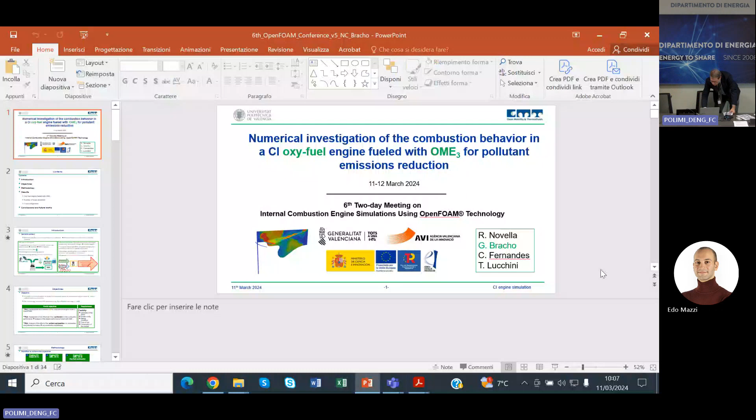Okay, so, title of Gabriela's presentation is Numerical Investigation of the Combustion Behavior in a Compression Ignition Oxy-fuel Engine fueled with OME-3 for pollutant emission reduction.

Thank you, Tommaso, for the introduction. Good morning, do you hear me fine? I am Gabriela Bracho from CMT at Universitat Politecnica de Valencia, and I am going to present the work entitled Numerical Investigation of the Combustion Behavior in a Compression Ignition Oxy-fuel Engine fueled with oxymethyl ether for pollutant emission reductions. This work has been done in collaboration with my colleague Professor Ricardo Novella and Cássio Spohr Fernandes, also from CMT, and with the strong collaboration from Professor Tommaso Lucchini from Politecnico di Milano.

The content of the presentation is the following. I will start with an introduction. In the second point I will describe the objective, followed by the methodology. In the fourth point I will discuss the results. I will focus on the oxy-fuel engine behavior or performance when fueled with oxymethyl ether. Then we are going to analyze the sensitivity regarding the number of orifices in the injector, and finally I will present the outcome, the final configuration we are going to manufacture, followed by some conclusions and future works.

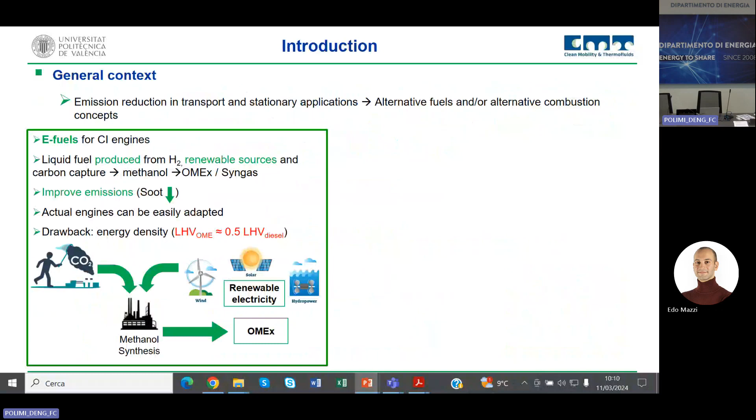On the other side, regarding combustion concepts, there are different technologies we are trying to analyze, for example RCCI, HCCI, etc. In our group we have been developing, since 3 to 4 years ago, something called the oxy-fuel concept. In this case what we are doing is removing the nitrogen from the air, so we only introduce oxygen into the engine. If we introduce only oxygen, the temperature in the combustion is quite high, so to control the temperature in the system we need to dilute this gas with EGR—we introduce gas composed of CO2 and water.

If we remove the nitrogen, the advantage is that all the products formed with nitrogen are also avoided, so we are not going to have NOx. This is the main advantage, but the problem is that the efficiency or fuel consumption is quite high. It decreases the efficiency, so we need to consume more fuel.

In the last edition of this conference, we presented a deep analysis of an engine using oxymethyl ether, and another analysis of an engine fueled with standard diesel in oxy-combustion conditions. But in this case, what we want to do is see how the performance is when we combine the oxy-fuel concept with an engine fueled with oxymethyl ether.

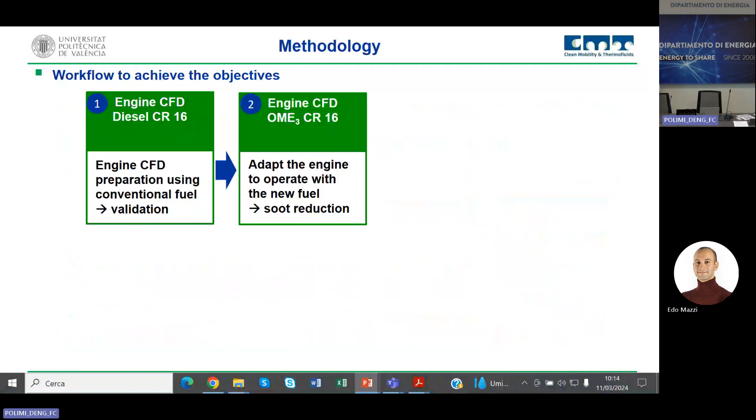Once this is validated, we move to the second step and fuel the same engine, with the same compression ratio, using oxymethyl ether. In this case, we want to evaluate the potential for soot reduction.

In the third step, we move to the oxy-combustion concept, targeting NOx reduction. We knew from previous analysis done over the last three years that we had to increase the compression ratio up to 20 to make this work properly.

Once this is developed, we wanted to see the sensitivity to the number of orifices in the injector, aiming to improve or recover the efficiency lost when applying the oxy-fuel combustion concept, and then finally decide which is the best configuration.

Let's go to the first step. We prepare our model using the OpenFOAM LibICE code. In this case, we were modeling the closed cycle, meaning from IVC to exhaust valve opening, and we use the fuel N-heptane.

The models we use for the platform are the KHRT for breakup, the RNG K-epsilon for turbulence, RIF for the combustion model, Spalding for evaporation, and Angelberger for wall heat transfer.

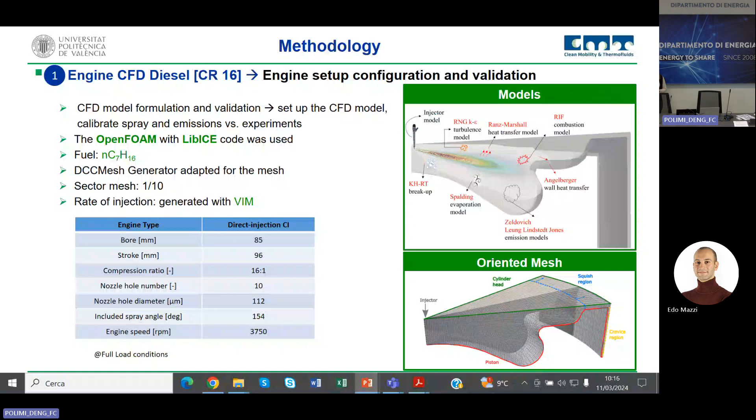So in terms of the results, the very first step was to do the sensitivity analysis of the mesh. We tested 5 meshes, and we realized that after the 3rd mesh we found convergence or independence in the mesh resolution. So we took the 3rd mesh, which has the lowest number of cells compared to the 4th and the 5th. In this case, one closed cycle took about 16 to 18 hours.

We also validated the fuel consumption and the emissions, NOx, and also the soot behavior. So at this point we said, well, this model is fair enough, it is prepared, and let's go to the second step.

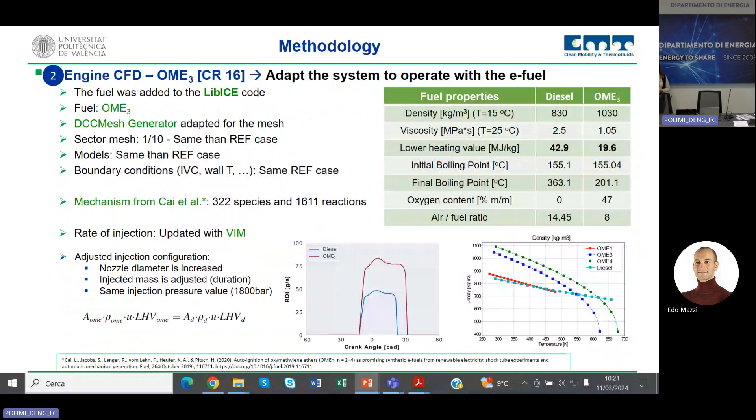To do this, we kept the same number of orifices, and we also kept the same injection pressure. So that means we had to increase the diameter of the nozzles to achieve this rate profile.

In terms of the combustion behavior, we see interesting things. The first is that we have a slightly sooner start of combustion. This is typical, since we have a different cetane number, and we expected this. Also, we have a higher rate of energy release, and then we also see a faster burnout, although the rate of injection is longer. But this is also characteristic of this type of fuel. This is in accordance with what we have seen in other experimental results done in our department, and also in accordance with the literature.

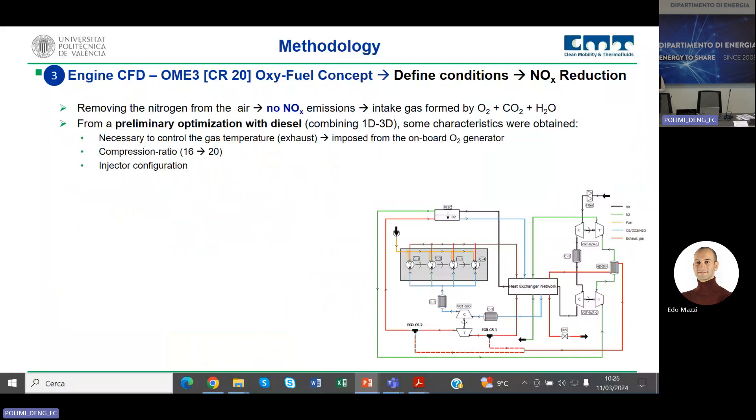This is because in the intake we don't have nitrogen, just a gas mixture of O2, CO2, and water. The properties of this composition are different, so we need to increase the compression ratio to overcome the problems of that composition. We also adapted the injection configuration to work with this higher compression ratio. This was obtained after about 1,000 simulations combined with an optimization algorithm we presented 2 years ago, called particle swarm optimization.

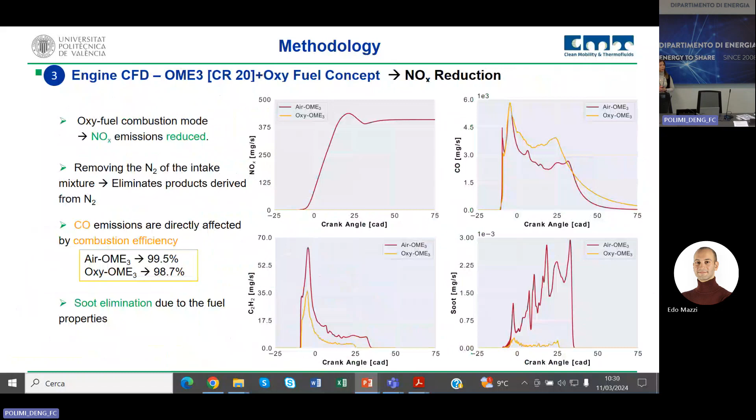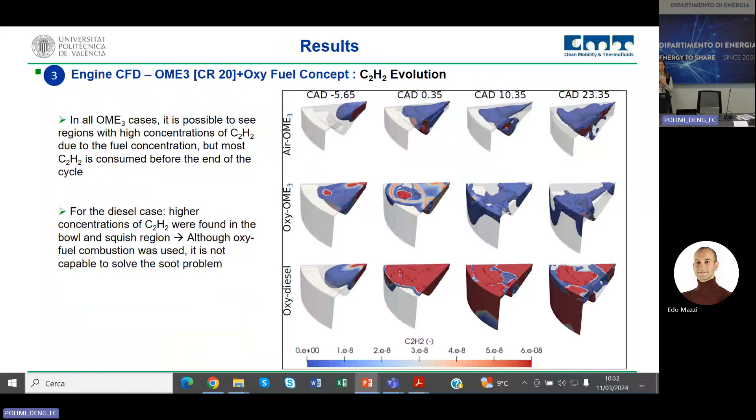If we go to the evolution of acetylene, we also wanted to understand how it is going on. Here we have air plus OME3, and then again the oxy plus oxymethyl. Although this is like a low soot fuel, we have some formation of acetylene with considerable values at some point, but it is consumed—most of it is consumed before the end of the combustion phase. Just as a reference, we present here the oxy with standard diesel, where the acetylene values are considerably much higher. So this is a good thing of the oxymethyl, and our combustion model is able to predict and reproduce this.

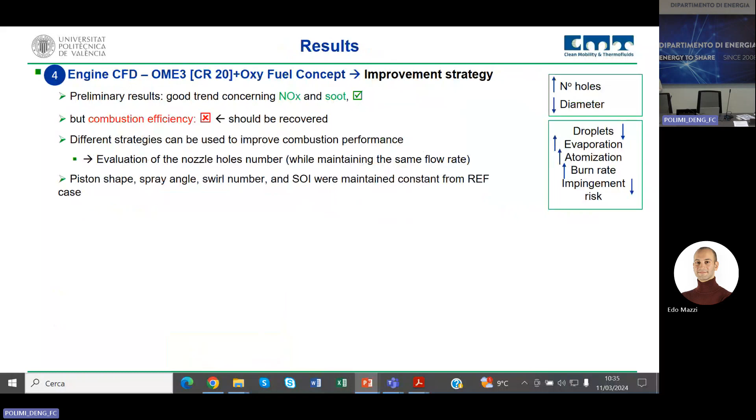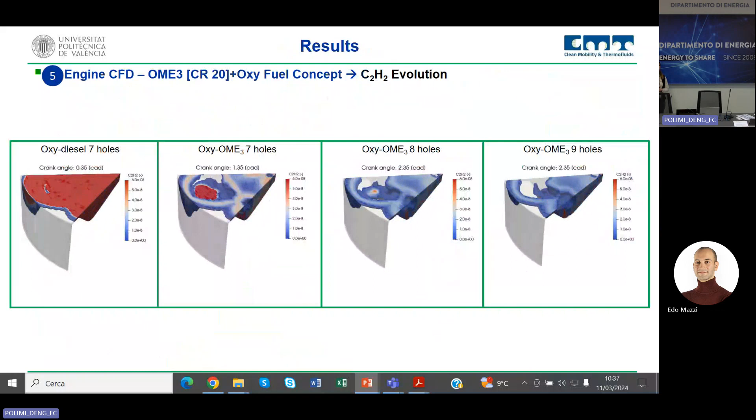In this short example, we are comparing acetylene, using diesel as the reference, where we have a lot of red, meaning high intensity of acetylene. Then we see more blue regions, but when we go to the 9 holes, which is the new configuration, we have less formation in the squish region, so we are improving the system with this strategy.

So at the end, this is the configuration that we selected for manufacturing and testing in the engine.

As a final comment, this is an overall analysis of the sensitivity regarding the injection orifice diameter. Here we are presenting the HC results, and we have less unburned hydrocarbons with the 9 holes. So it's good, we are increasing combustion efficiency, and they are related—this is what we were targeting.

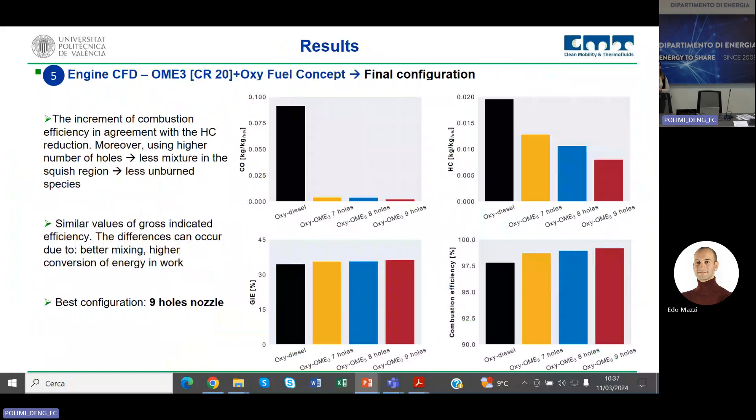So again, the best configuration is this one. If we increase this, we are also increasing the gross indicated efficiency. With this, I finish the presentation.

As a summary, we have been able to combine both platforms that we developed before, one for the OME3 and the other for oxycombustion. The good thing is that we were able to decrease the NOx and decrease the soot.

Of course, we are sacrificing a little bit of efficiency and fuel consumption, so there is still room to improve.

As a next step, we need to validate these results with experimental data, and the test bed is already in place. Let's wait for the results so we can see if these trends are well captured or if we need to readjust some. Also, we need to explore other operating conditions, and right now what we are targeting is to analyze other fuels.

This is part of another work package for another project. We want to see spray development using, for example, ammonia. As a sneak peek of the next step, this is ongoing right now, together with support from Professor Tommaso.

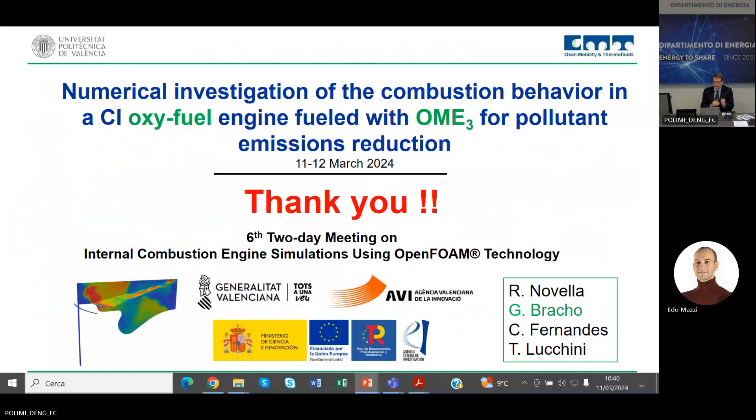Okay, we have time for another question. Yes, please. At some point you showed this one, you see that as well. Again, is it faster than? Yes, we think that is because of the reactivity of the fuel. We have more oxygen, it is more reactive, and it also burns faster.

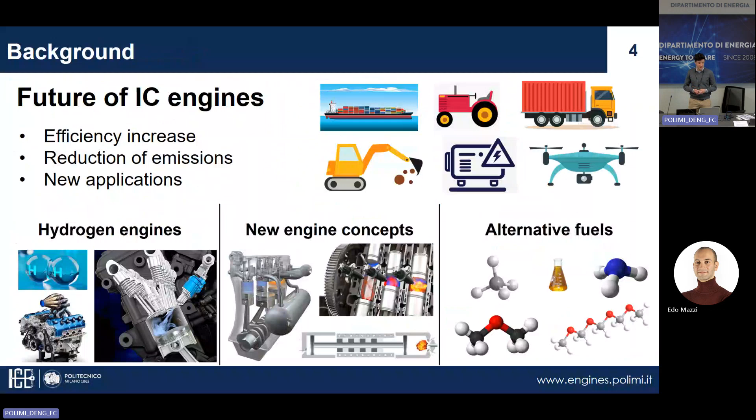So nowadays, internal combustion engines are experiencing a disruptive evolution in order to meet the main target of carbon abatement. And to reach this target, there are mainly 2 ways: first, the usage of alternative fuels, zero carbon or low carbon ones, and the other is the usage of a new engine concept to maximize engine efficiency. So in this talk, we will focus on the hydrogen engine concept as a solution to decarbonize power technology. Hydrogen is a non-conventional fuel compared to traditional hydrocarbons, so we need to assess our consolidated CFD methodologies prior to applying these methodologies for this engine design.

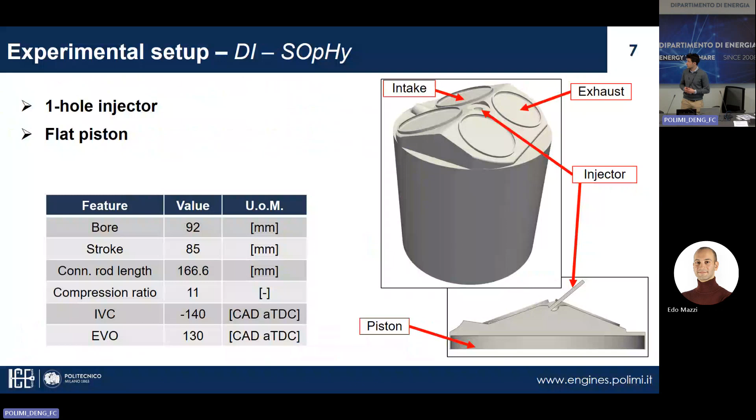So first, let's have a look at the direct injection hydrogen engine configuration called SOpHy. This is a Pentroof configuration with a single hole injector and a flat piston. In this case, we studied a non-reacting condition where hydrogen is directly injected into pure nitrogen. Here we have, in this condition, basically no tumble, and the hydrogen injection is carried out completely during the compression stroke.

About the numerical approach, we simulated only the power cycle using a RANS methodology. As a first step, we employed the standard K-epsilon turbulence model. At intake valve closure, we initialize the flow at rest, with pressure and temperature provided from experimental measurements.

About the hydrogen injector, we extruded 20 millimeters of mesh starting from the nozzle exit section in order to avoid interactions between the hydrogen inlet section and the flow dynamics that happen at the nozzle exit, like expansion fans or normal shocks that are expected in case of an underexpanded nozzle.

In this case, at the inlet, we apply mass flow rate and the total temperature.

About the mesh, in this case we studied two different mesh types. First, we started from a base configuration where we have only a half engine domain because of symmetrical reasons. The mesh is non-oriented, hexahedral-dominant topology, and the piston motion is accomplished by means of dynamic addition and removal of layers. Then we compare this base mesh with a refined strategy where three conical refinements are applied at the exit of the nozzle.

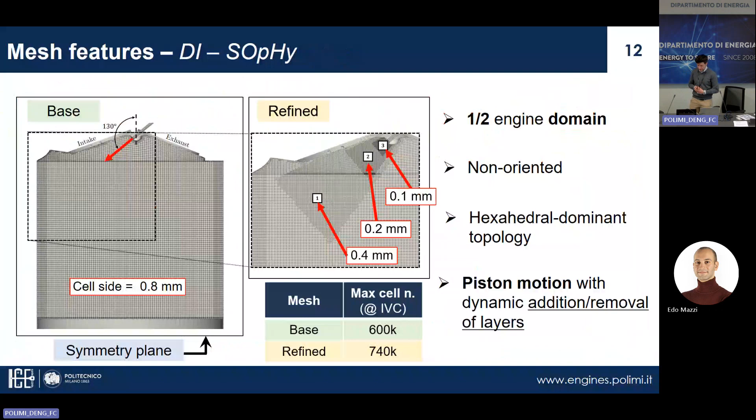The importance of applying these refinements is identified by these results, where if we look at a certain instant during the injection process and look at the Mach number, we can notice that with the base mesh we are not able to predict the flow structures in terms of expansion fan and normal shocks, while the refined approach is able to reproduce these phenomena that impact the distribution of hydrogen inside the cylinder.

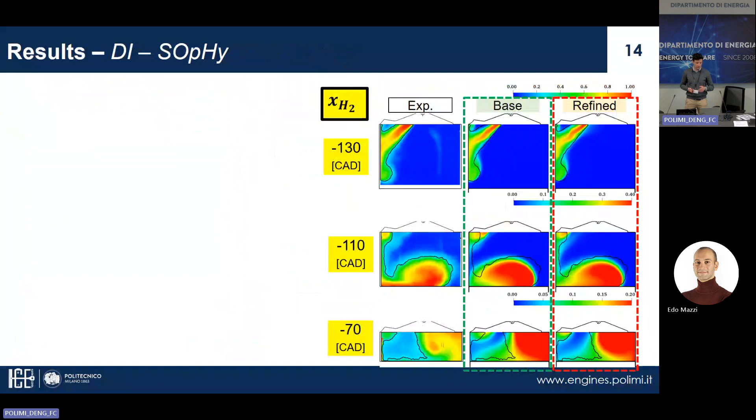If we look at the molar fraction distribution with the refined mesh, base mesh, and experimental, moving from right to left, and look at the instant immediately after the end of the injection process, we observe an improvement with the refined mesh because we are able to predict a reduction of the jet momentum due to the resolved normal shocks. So it is important with hydrogen to have enough mesh refinement to properly capture such events.

However, if we look far away from the end of injection during the compression stroke regarding hydrogen mixing with nitrogen, we still have some underestimations, but compared to literature these results are for now satisfactory. These good results for the mesh can also be detected if we look at the velocity distribution, where in the same bottom region, with the refined mesh we were able to improve the numerical-experimental agreement.

Now let's move to the port fuel injection configuration of the PenHy engine. PenHy engine is a Pentroof engine with a central spark plug and a shaped piston. In this case, we have a rather high tumble ratio, and we studied ultra-lean combustion by means of variation of load and increasing dilution.

Here again, mesh features are similar to the SOpHy engine: basically a half domain of the engine because of symmetrical features, a non-oriented mesh, piston motion again with dynamic addition and removal of layers, and homogeneous mesh features.

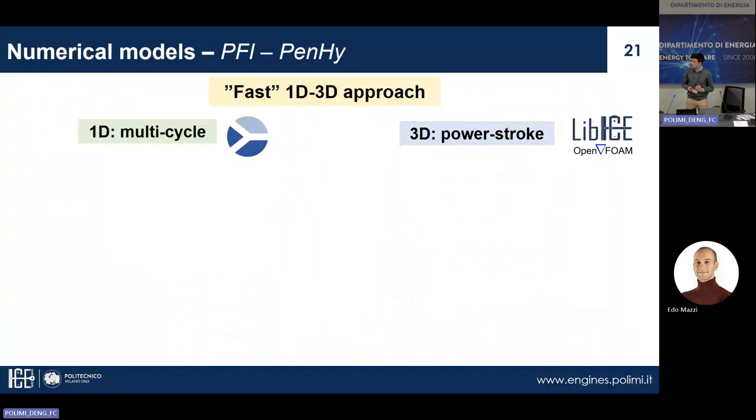But to study this configuration, we tried to use what we call a fast 1D-3D approach. This approach, developed here at Politecnico, aims to have a quick study of an engine configuration without performing a long gas exchange 3D simulation, but providing a first assessment of the engine. To do this, first you need to study the engine with a 1D approach.

In this case, we used GasDyn software, our in-house tool, to do these simulations considering the full engine schematic. Then we retrieved closure conditions of pressure and temperature inside the cylinder to initialize the 3D simulation, performed with LibICE, software developed here at Polimi based on OpenFOAM technology to study engines, in order to simulate only the power stroke.

Then, obviously, after the compression we were able to simulate combustion. But at intake valve closure, we need to initialize the tumble if we do not have a complete gas exchange simulation.

To do this, we developed a new simplified strategy consisting of three steps. First, we initialize the tumble by providing a tumble ratio defined by the user. The user can also define some shape function for the tumble along its axis and radius. Then we let the flow adapt to the geometrical details of the combustion chamber, and finally we need to rescale the velocity field in order to compensate for energy losses in the adaptation stage.

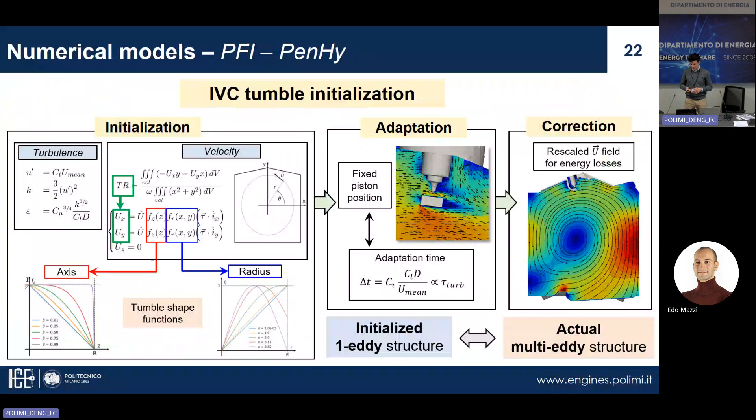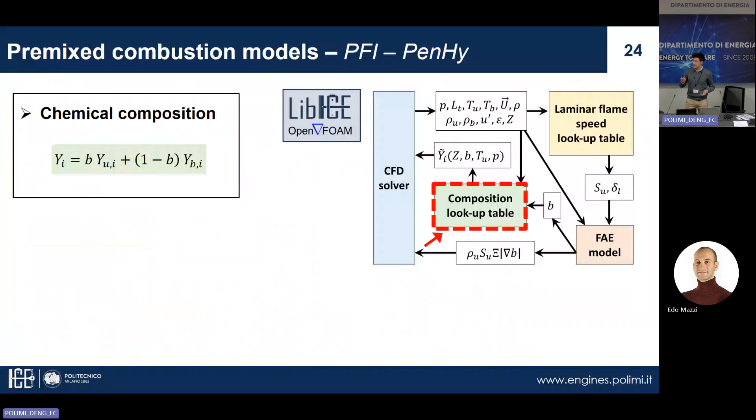About premixed combustion, we employed a model based on the flame area evolution. We solved a regress variable equation to mimic flame propagation, using a simple deposition model for ignition, with turbulent flame propagation modeled according to Peters correlation. For chemical composition, we linearly interpolate the fresh mixture and fully burned mixture composition, both retrieved by tabulated kinetics performed with the OpenSmoke software.

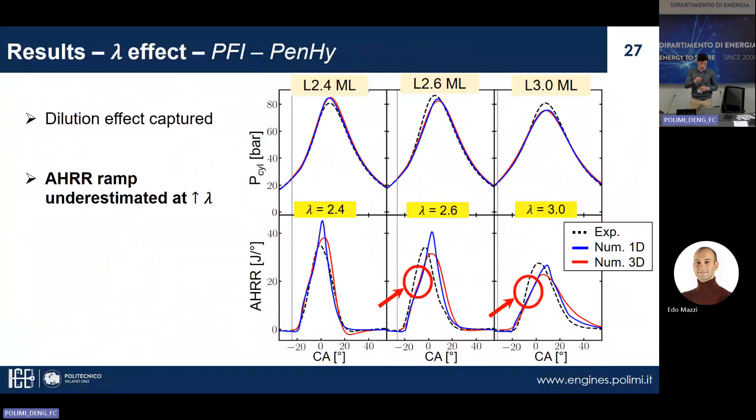Looking at the results with increasing dilution effect, we got rather good results in terms of this phenomena. Experimental measurements are the dashed black line, while 1D and 3D results are reported in blue and red respectively. However, looking deeper at the results, we have an increasing underestimation of the initial ramp of heat release as dilution increases, probably because of under-prediction of laminar flame speed, since the correction we applied was developed only up to a limit of 2.5 lambda, but there are probably other uncertainties we need to clarify.

Looking at the load effect, the experimental trend is also captured, but we have a higher underestimation at high load, probably caused again by the limitation of this correction, which is higher than for dilution, because the laminar flame speed correction here is valid only up to 20 bars, but for the high load condition we exceed 100 bars. So there is room for improvement, but the first results are really promising with this simplified methodology.

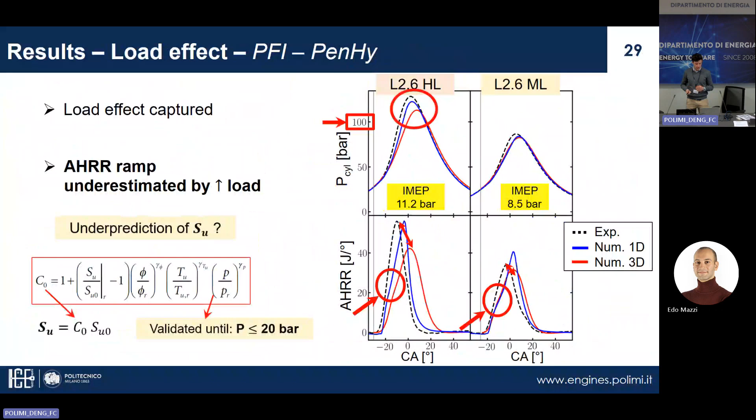Finally, let's complicate our CFD methods a bit and try to simulate the whole full cycle again with port fuel injection, but applied to the FLHy engine. The FLHy engine is characterized by a flat head, central spark plug, and a symmetrical piston bowl. Here we have a rather high swirl ratio, and hydrogen injection is completed about 120 degrees before intake valve closure. We focused our analysis only on the ultra-lean condition.

Here we have a full methodology where we need to perform a complete 3D full cycle simulation. First, we start from 1D analysis of the engine schematic to retrieve boundary conditions for 3D: time-varying pressure and temperature at inlet and outlet, and temperature at the walls.

Then we tested two different strategies. On the left, assuming the PFI injector works properly and everything is homogeneous, we apply a homogeneous hydrogen-air mixture at the inlet, which lets us shorten the computational domain a lot. On the right, we have a complete engine with a full intake manifold where we simulate hydrogen injection, requiring a wider computational domain, while the lambda homogeneous case uses a shorter domain that reduces computational effort.

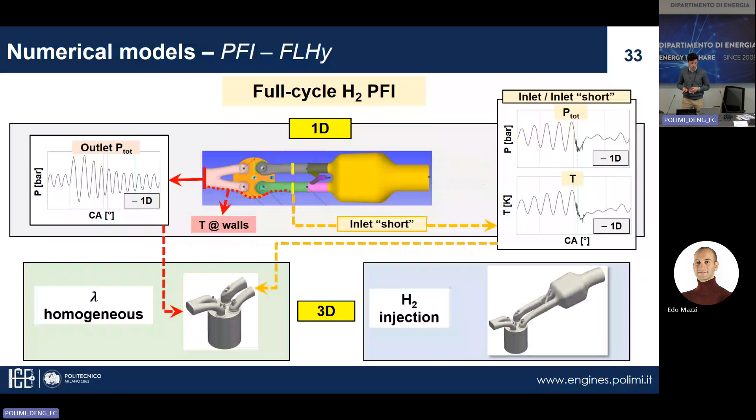About the mesh, looking at this last configuration of lambda homogeneous at exhaust valve opening, we have a full engine domain with a non-oriented mesh and specific refinements to properly capture the details of the combustion chamber and particular valve positions, like the minimum lift, because we need to properly reproduce the flow.

Inside this narrow region, for piston and valve motion, we employ a mesh deformation approach: we deform the mesh until it is no longer valid, then when the validity limit is exceeded, we redo a new mesh, and so on. To cover a whole cycle we employed several meshes with deformation. From the movie, you can see how we modify the refinement according to valve movement to optimize the description of the fluid dynamics and minimize computational effort.

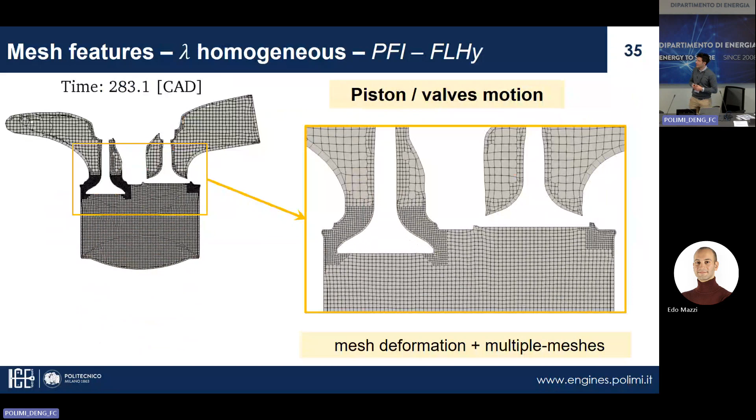In this case, we built up 84 meshes with an average cell size of 500,000 cells. The generation time is rather low, since it was run on a laptop processor in 8 hours.

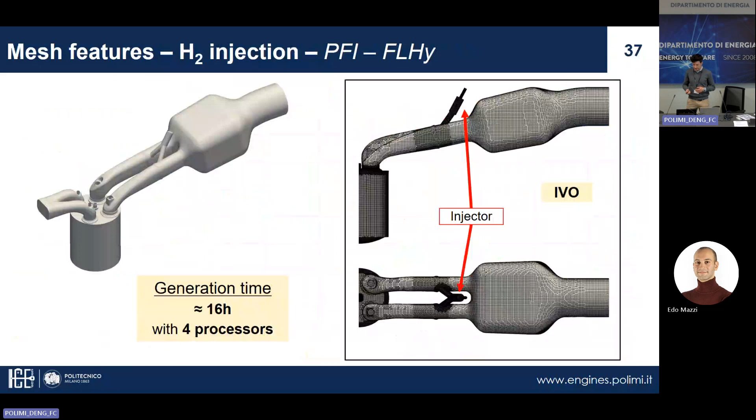The time doubles if we need to also model a hydrogen injector, PFI injector, because we need to properly refine the mesh nearby the injector, and we have a wider 3D domain. About the injector, same strategy was employed for the surface.

So we extrude the mesh here not only to position the inlet far from the nozzle exit, but also to have a cell oriented as the inlet of the hydrogen. And this minimizes computational issues.

About inlet boundary conditions, similarly to the surface, we imposed a mass flow rate and a total temperature. About the Prometheus combustion model, I won't go into details because it is the same approach that we used for the PenHy engine.

we have a good match between them. But the approach is consistent because we applied the 3D schematic boundary condition from the 1D model.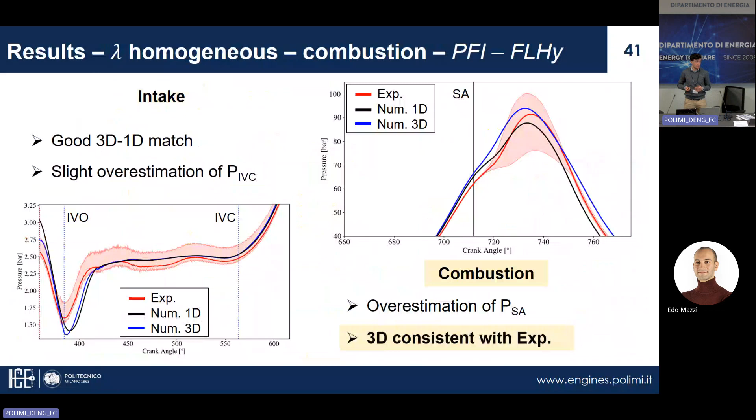So we think that by improving the calibration of the 1D model, we are rather confident that our 3D results will significantly improve, despite the shape already being rather similar to the experimental ones.

What happens instead if we simulate the port-fuel injection? Do we reach a good homogeneity inside the cylinder? Is there any accumulation of hydrogen in the intake manifold?

And to do this, we do need multiple 3D cycles because we need to reach steady-state injection conditions.

And as you can look at in the movie, after cycle 0, we see an accumulation of hydrogen. So it is fundamental to do more consecutive cycles. And here we simulated 3 cycles.

And if we look at the hydrogen mass distribution over different lambdas, at two instants of interest, like intake valve closure on the left and spark advance on the right, we can first observe that from cycle 0, the blue, to cycle 1, the green, we have a variation.

So it means steady state conditions are still not reached. While at cycle 2, basically, we are already almost at steady state features.

Then, if we compare these results with the target air-fuel ratio that we would like to reach, we see that the compression, moving from IVC to spark advance, helps a lot in the homogeneity. And also at spark advance, we do not have a perfect homogeneity because in this case we have some internal recirculation of exhaust gases.

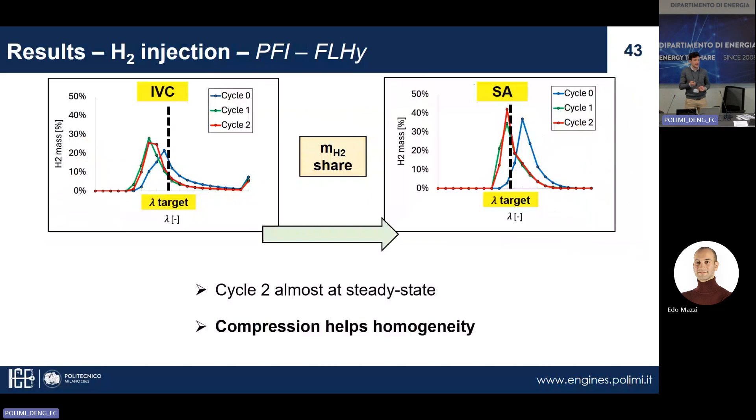But a curiosity is, if we look at the volume share occupied by this small stratification, we can notice that despite the majority of the mass being very close to our target, the volume occupied in the cylinder is more occupied by the richest mixture because of the properties of hydrogen.

So hydrogen is characterized by a high specific volume. And so in case of a slightly richer mixture with respect to our target, its occupancy of volume is wider. And so we have this slight mismatch between the mass stratification and the volume occupancy.

So in conclusion, we can see that with our methodologies, we are able to study 3 different hydrogen internal combustion engines by modeling 2 different injection strategies.

So direct injection, port-fuel injection, and we also have simplified techniques, so we are able to initialize conditions at IVC and do fast simulation also in 3D.

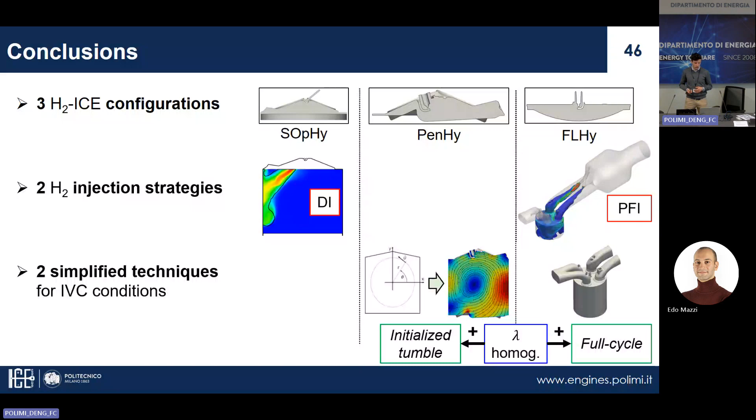About stratified combustion, Tommaso will show you something tomorrow. But anyway, what we can conclude is that with LibICE, we have a rather wide set of validated methods to model spark ignition hydrogen engines.

However, this is only a starting point. So there is a lot of room for improvement.

In fact, the code is always under development in order to improve the experimental numerical consistency, to minimize the computational cost, and also to ease the user-friendly approach.

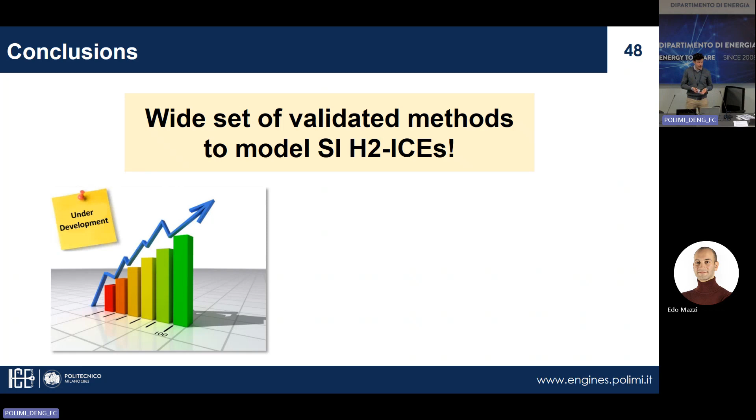And so my suggestion is stay tuned, because new developments will come soon.

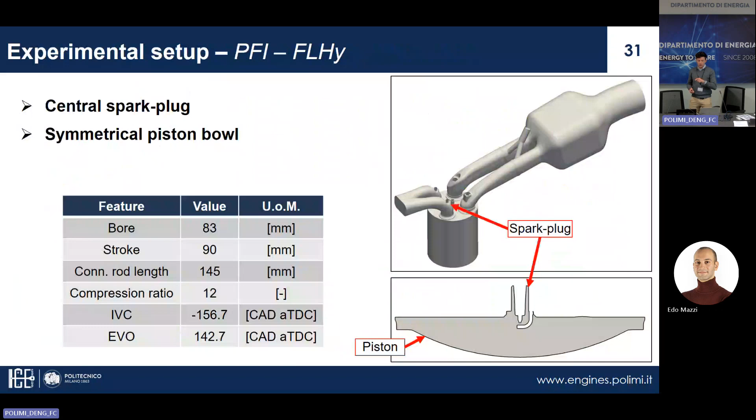We still have a not perfect matching of the tumble motion generated by the hydrogen injection, and probably by improving it we can improve the diffusion, because in our case the vortex is more concentrated and probably keeps the hydrogen there. Even though hydrogen diffuses, the motion - as I said to Benjamin - impacts this. If you have a global average motion, it tends to confine the hydrogen. So probably it's not a matter of Schmidt number, but a matter of flow structures that should be improved for the engine.

Second question I have - what did you do with wall temperatures?

About temperature, we impose a fixed value temperature at walls from 1D, so there is this limitation, but the flame interacts at walls considering that we model the thermal diffusivity according to the turbulence of the cell at the walls, so we model the thermal losses this way, but we impose temperature at walls for now.

About knocking - yes, in this model we do not have a knock model, but we can do it. So in case of need, we also have this possibility, yes.

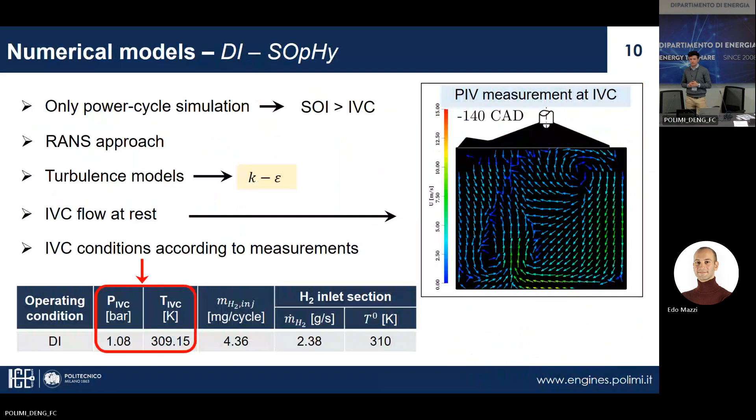These are PIV measurements. And then basically when you have the injection, the flow, in the case without tumble, is totally driven by the injection of hydrogen, because you have high velocity, high momentum, despite the hydrogen being light. I was wondering why you have that.

One motivation could be that you have some discrepancy in the initial condition. The other could be that you are considering only a sector. No, here we are considering a half engine domain. We can try to consider all, but it is symmetrical, so it is not a sector, this is half engine domain.

So here it is a good point. We think we need to improve this tumble, but this tumble is basically generated by the hydrogen injection, because it is totally driven by the injection. So probably it's a jet-wall interaction that we'd like to improve. Yes, but I agree that maybe it's a problem with convection. Yes, it is probably something about convection.

Okay, any other questions? Okay.

Okay, the title of our presentation is on the development of preferential evaporation in isooctane ethanol spray. Thank you for the introduction, very nicely introduced. Today I will mainly focus on the model development and the approach we're taking, which steps we're taking, and then I'm going to show you some intermediate results.

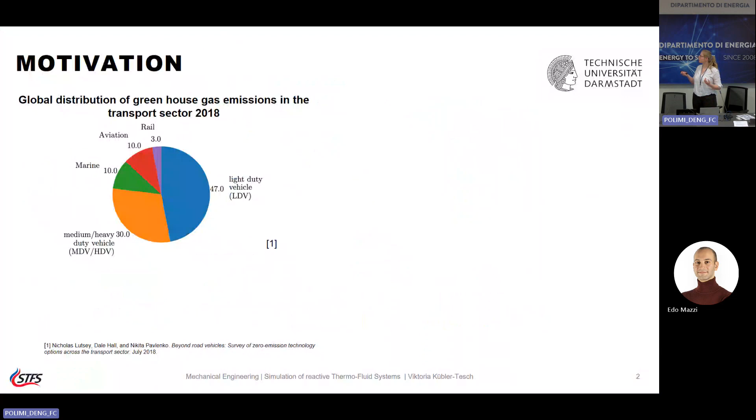But first, let's go to the motivation. As you can see, most of the greenhouse gases in the transport sector are created by internal combustion engines. With the climate crisis, we know we need to improve combustion engines because they are still mainly in use, and going in the wrong direction. However, modern combustion engines have stricter requirements. For example, we expect them to have low pollutant emissions and greenhouse gas, but also soot emissions, and we also want them to use CO2 neutral fuels.

And here, ethanol as a promising renewable fuel is introduced. This is what I'm focusing on. Actually, there was a New York Times article three weeks ago showing that in US politics, a ban on E15 fuels was lifted. So we will see more ethanol maybe in the US.

With those new ICE engines, we also expect them to still have a higher combustion efficiency. With new fuels, we have new challenges. We will have different spray and mixture formation, which will inherently affect the combustion. In my presentation, I will be focusing on the spray formation and here on the model development.

We are using in OpenFOAM the Euler-Lagrange method. Here we're describing the liquid in parcels, which we are following, and each parcel represents a collection of identical droplets.

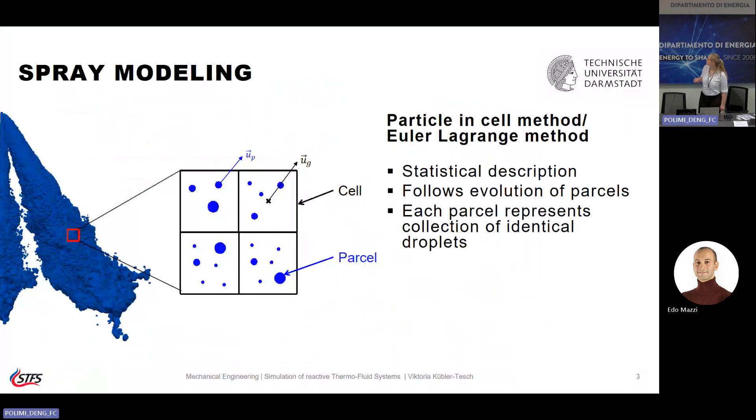If we're looking into the particle modeling, we have a particle, we have some flow around it, and we solve the momentum equation, and we assume the particle to have a drag force and gravity acting on it.

We're also solving some sort of an energy equation. Here we're looking at the temperature of the droplet, which is affected by convective heat transfer, shown here with QS, and also which is affected by the evaporation happening in the droplet, which is modeled this way.

So that way we have a temperature equation, and then we're also looking with multi-component fuels at the species in the droplet. When we look at the species, we're looking at the interface between the liquid and gas phase, and here we assume a vapor-liquid equilibrium, which with multiple components will lead to preferential evaporation, and usually it is modeled with ideal liquid and gas.

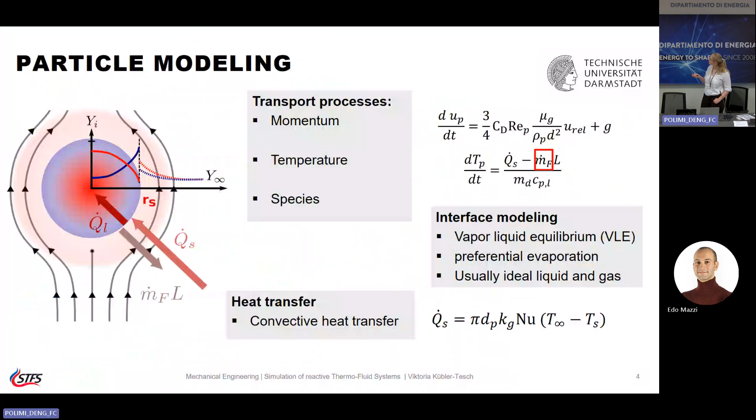Usually it is modeled with ideal liquid and gas. However, the species usually also affects the heat transfer, so those are strongly coupled.

When we model the evaporation, here is shown the term for the mass transfer from the droplet into the gas. We're using the Spalding mass number, which looks at the gas mass fraction at the surface and also the gas mass fraction in the far field. We're using that for the species transport.

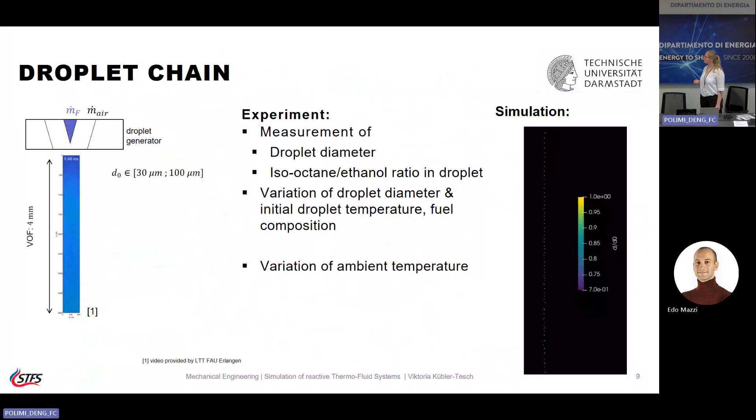After that, I also looked at an ideal droplet chain with different ethanol concentrations at a high temperature. What you can see here is that with a low ethanol volume concentration, isooctane also starts accumulating in the droplet, and unsurprisingly, the same happens for the E70. We expect to see a different result here with a real VLE.

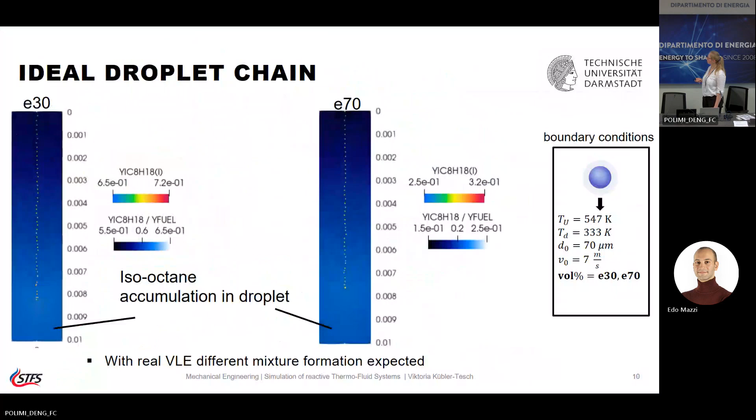Lastly, we also looked into a Spray G condition with two different fuels. One is a 3-component fuel of N-pentane, isooctane, and undecane. The other is a 9-component fuel called PACE 20, which contains roughly 10 volume percent ethanol. We modeled those after experimental data, and the focus here was on the mixture formation in the gas phase.

The way this was modeled is they looked at the ratio of the low volatile fuel, for the 3-component fuel this was undecane, relative to the other fuel components. What you can see is that there's some segregation, with most of the low volatile fuel close to the nozzle. If you look at this with the PACE 20 fuel, using the same modeling approach for the low volatile fuel, there's a higher segregation in the spatial area of the mixture.

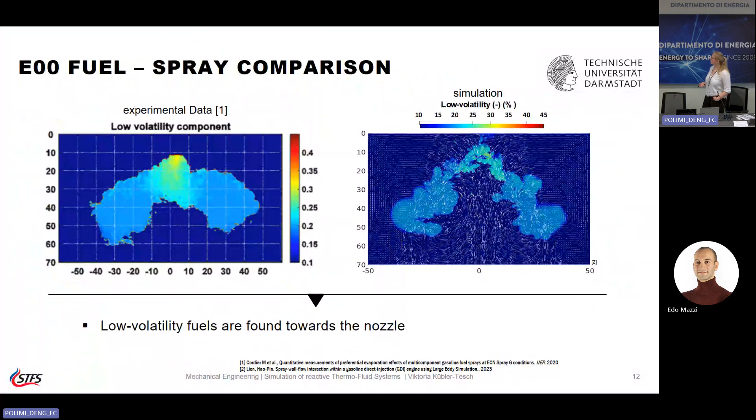This is also done with an ideal VLE approach, and we matched this case pretty well. You can see the segregation very close to the nozzle, and this was done quite well. But if we look at the fuel containing ethanol, we do see high discrepancies, and the segregation there is of course also higher. This will be interesting to analyze with a real VLE.

I think that's it. As a summary, I introduced the modeling approach of a real VLE, which will be implemented in OpenFOAM. The approach here is to increase the complexity and validate during the whole implementation process.

In general, the outlook is that I hope to present the results of the real VLE sprays. I think the step after that would be to look into combustion characteristics with those different mixture formations. This will be very interesting because we know that alcohol fuels, in the case of a diesel engine, have very different combustion characteristics. In this diesel spray, we see that alcohol fuels actually have a higher ignition delay time. So it will be interesting to see how this affects gasoline spray.

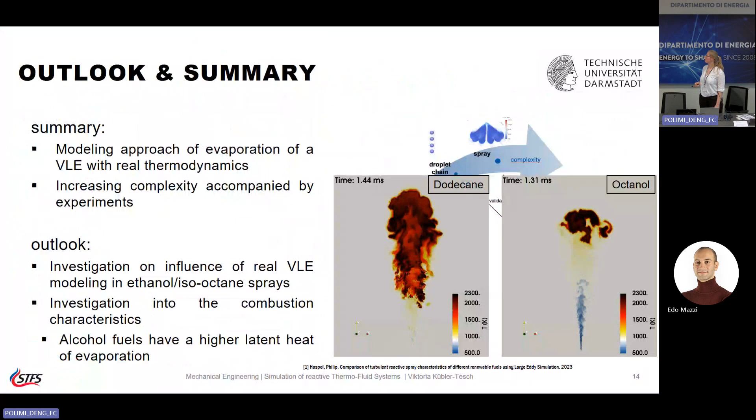And here I'm at the end. Thank you for your attention. I would also like to say thank you to all my colleagues and my boss. Thank you.

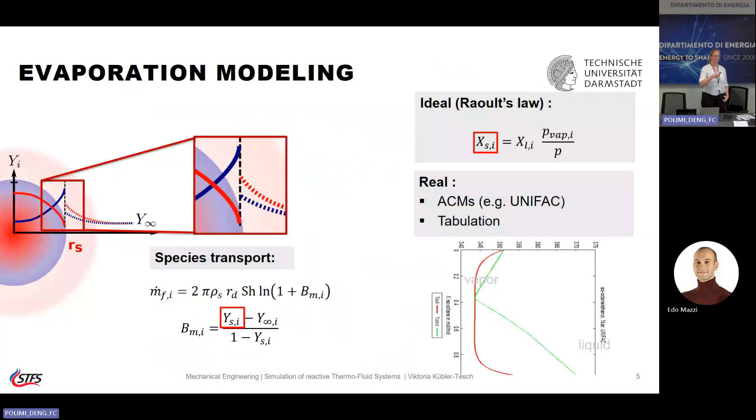More questions? Imagine that the next step will be the pressure inside the droplet. I understood, so the next step - this is when we're inside the droplet. Actually, I'm first doing the real VLE on the outside, and I don't think full VLE in a spray will be feasible to calculate during runtime, so I'm currently focusing on the VLE on the surface and implementing the real thermodynamic model. The next step will be in the spray, but I'm still assuming 0D in the droplet.

Any more questions? I have one. You show that you are tabulating the saturation molar fraction - you mean this one? Yes, you pick up X_s and put it in the Spalding formulation, but this is taken from a table instead of calculated from a correlation. How long does it take to generate a table? I'm unsure, I don't think... I think the hard part is table generation for bicomponent fuel, which is rather simple. Okay, bicomponent fuel - the more components you have, the more complicated it gets.

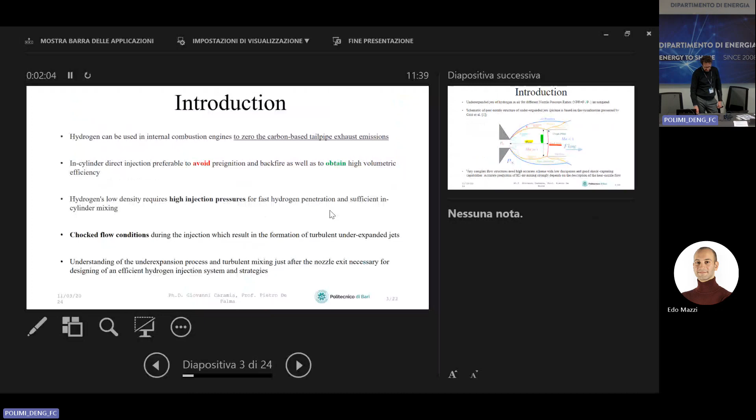This results in the formation of turbulent underexpanded jets. Understanding the underexpansion process and turbulent mixing just after the nozzle exit is necessary for designing an efficient hydrogen injection system and strategies. Here I'm showing the complex structure of the jet just outside the nozzle exit, and here we can define the NPR, the nozzle pressure ratio.

We will investigate many different values of this parameter. Here I also highlighted the two main characteristic parameters of an underexpanded jet: the Mach disk height and the Mach disk width. You can note that the structure is very complex, so the need for a highly accurate scheme with low dissipation and good shock capturing is needed.

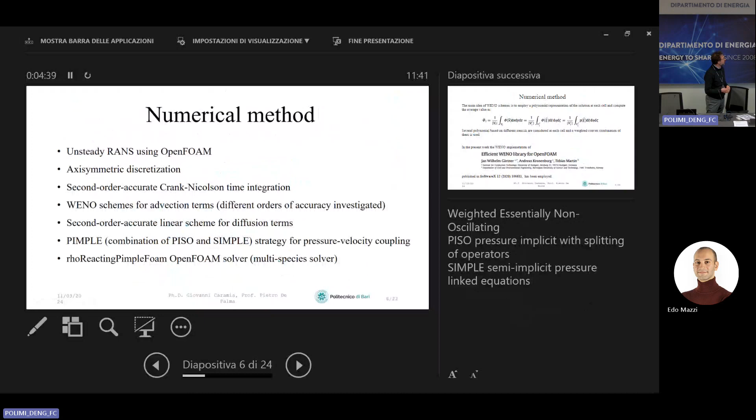We use axis symmetric discretization for a lighter computational effort, with second order accurate Crank-Nicolson time integration and WENO schemes for advection terms, considering different orders of accuracy. For diffusion terms, we use the second order accurate linear scheme, and for pressure-velocity coupling, we use the PIMPLE strategy. The OpenFOAM solver name is rhoReactingPimpleFoam.

Regarding the numerical method, we have to cite the work of Gärtner, who developed the WENO scheme inside the OpenFOAM library.

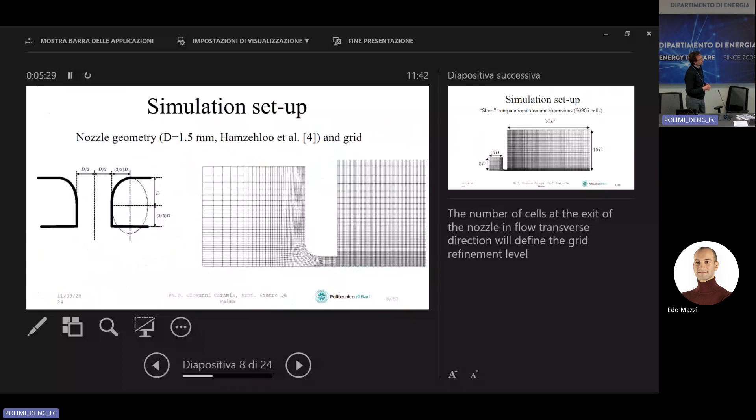Here we start with the simulation setup, depicting the nozzle geometry and the grid structure near the nozzle exit and inside the nozzle. Here is the computational domain. We call it the short one, used to better investigate the jet structure near the nozzle exit, while we used a longer one with local grid refinement to better understand the hydrogen diffusion process inside the chamber.

The simulation initial and boundary conditions consisted of rest conditions as initial condition. It was assumed that hydrogen occupied the entire high pressure reservoir and a tiny part of the converging nozzle, up to 1.4 times the diameter value upstream of the nozzle exit. Air occupied the low pressure ambient and the remaining in-nozzle volume. As a curiosity, it was possible to use a slip condition inside the nozzle because of the verified Knudsen number.

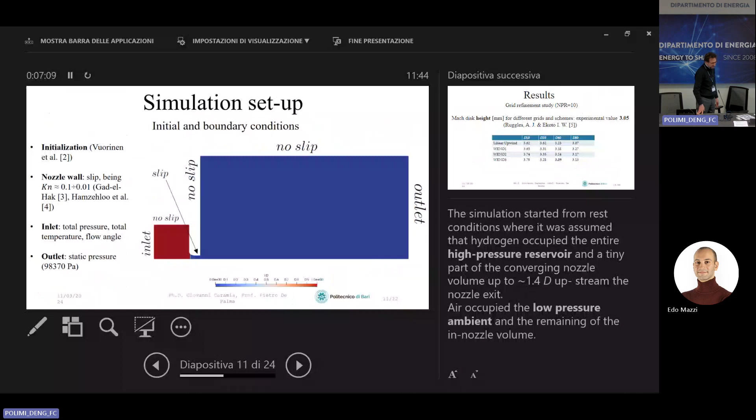Now we are at the grid refinement study. We consider a value of NPR equal to 10, and here we consider the Mach disk height as a parameter, considering an experimental value of 3.05. Our grid refinement study also dealt with the use of different discretization schemes. Here XX identifies the number of cells at the nozzle exit in the flow transverse direction, while N identifies the order of accuracy: N1 is second order, N2 third order, and N3 fourth order.

As we can see, we reached good agreement with the experimental value and stabilization of the calculated value, considering N3 and 40 as the grid refinement level. The same holds for the Mach disk width.

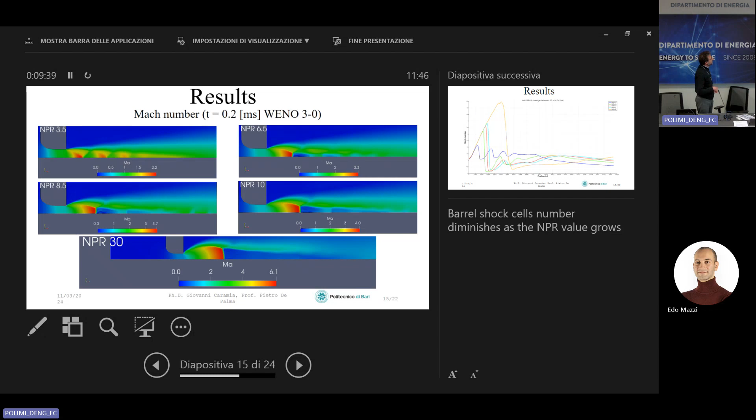Varying the NPR values, the structure of the flow changes. Counterintuitively, the number of barrel shock cells - where a barrel shock cell is this structure here - decreases when the NPR values increase.

Something similar here: this is the Mach number on the bottom part of the computational domain, and we can see two things mainly. First, the Mach disk height increases as NPR increases, and secondary Mach disks appear that vanish in the same way.

The message of this slide is why use higher order discretization schemes: because with these schemes we can capture instabilities that lower discretization order schemes do not capture. Specifically, on the lower right, we can see Kelvin-Helmholtz-like instabilities using WENO 3.0 discretization scheme, where by WENO 3.0 I mean a fourth order discretization scheme without a limiter.

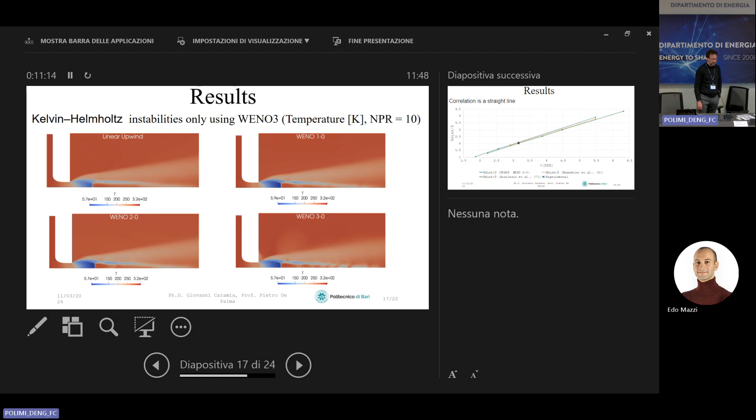Again, results: this is a correlation between the Mach disk height and the square root of NPR values. We can see that our computation resembles the straight line correlation type, and importantly, the gradient of this line is in good agreement with numerical and experimental data available in literature.

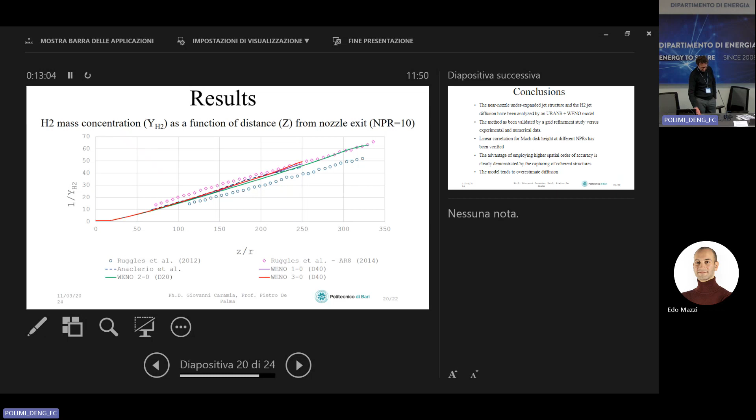So here we are at the conclusions. The near-nozzle under-expanded jet structure and the hydrogen jet diffusion have been analyzed by a URANS and WENO model. The method has been validated by a grid refinement study versus experimental and numerical data. A linear correlation for Mach disk height at different NPR values has been verified, and the advantage of employing higher spatial order of accuracy is clearly demonstrated by the capturing of coherent structures.

We have to say that the model tends to slightly overestimate diffusion, for the most part far away from the nozzle exit.

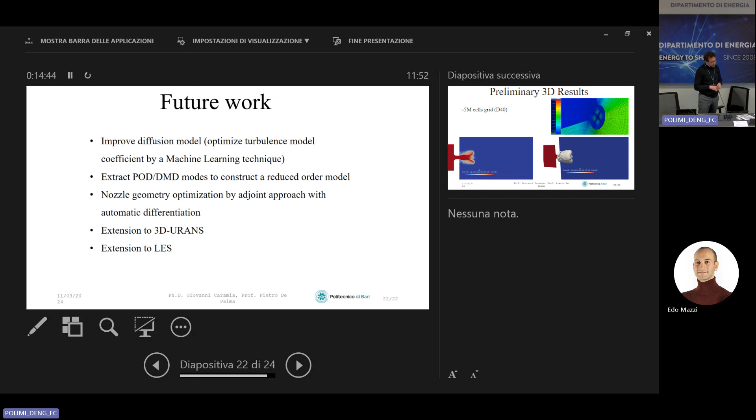Future work includes improving the diffusion model, eventually using machine learning techniques to extract proper orthogonal decomposition or dynamic mode decomposition modes to construct a reduced order model, optimization of the nozzle geometry using adjoint approach with automatic differentiation, extension to LES and to 3D-URANS.

I'm glad to present some preliminary results. Here we can see the structured grid used for the computational domain, the classical butterfly grid with structure. And below, there is the hydrogen diffusion in terms of mass fraction, firstly on a plane passing through the nozzle axis, and secondly as a picture of a 3D evolution.

So the outline of my presentation: I will give you a brief history of Gasdyn. I will show you several configurations of different engines that we simulated, and I will explain some 0D, 1D simulation models that we develop and apply. In particular, I will highlight the importance of new fuels, renewable fuels, hydrogen, ammonia, and others, and I will show some recent results.

Why are we going to talk about 0D, 1D simulation in this session? Because as you see from the previous presentations, it is always important not only to give the boundary conditions calculated by 1D models to 3D simulations - temperature, pressure, pressure pulses, these are important boundary conditions - but also to compare the simulations of 3D models and 1D models to check the consistency and verify the quality of calculations.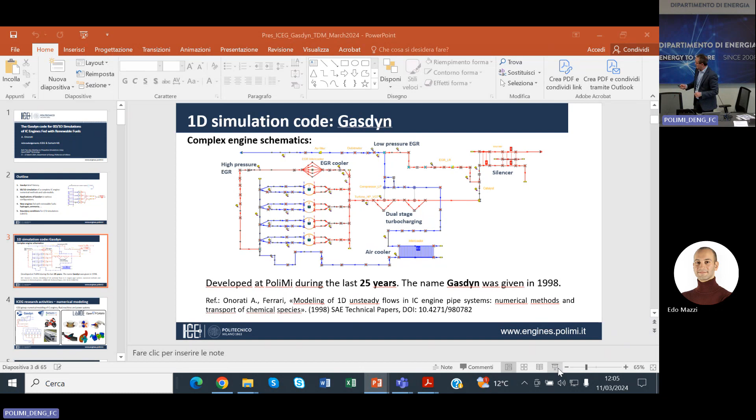We started developing Gasdyn more than 25 years ago, and the name Gasdyn was given in 1998 - I gave the name, just to tell that. At the moment, our group is busy with 2 important fields: the development of LibICE, the set of libraries in open form that we are discussing right now, and also working on Gasdyn new developments, new routines, new solvers, new boundary conditions, in collaboration with Sursum, the spin-off in charge of managing the Gasdyn activities.

So I will show you some different examples. These are recent engines that we simulated during the last couple of years. For example, on the left, you see a 3-cylinder spark ignition turbocharged gasoline direct injection engine for the Renault Captur, which we investigated in detail during our European project. You see the complete schematic of this system from the intake to the exhaust.

On the right, a high-performance motorcycle engine, a 1-liter 4-cylinder MV Agusta engine, in which you can recognize all the typical elements: pipes, plenums, injectors, junctions. This is, for example, a 4-into-1 multi-pipe junction, the after-treatment system, the silencer. So these are recent schematics that can be well managed by the interface.

Just to remind what are the fundamental equations for a code in charge of solving unsteady flows: the 1D conservation equations for mass, momentum, and energy, considering compressible and unsteady flows with transport of chemical species listed here. We have a model that can also track the chemical species.

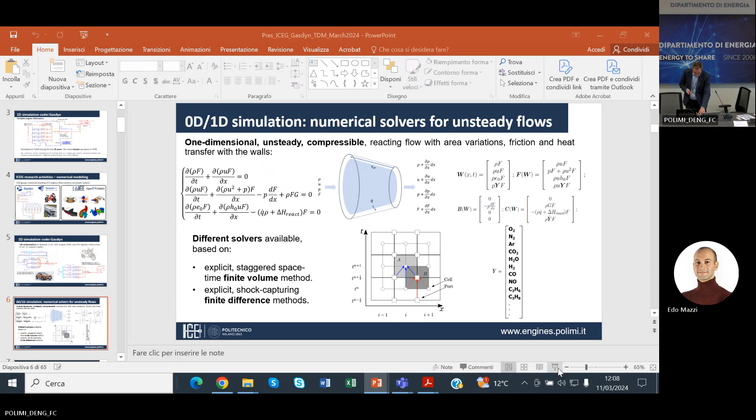Now, what about the combustion model? There are several options in the combustion model, which is based on a quasi-dimensional approach with multi-zones. In the combustion models, we can take into account premixed combustion and non-premixed combustion.

In this case, for example, we have a premixed combustion, and in a recent development, we can introduce empirical correlations for the calculation of laminar flame speeds, but also a tabulated kinetic approach that is more accurate, taking into account the nature of the fuel - hydrogen, ammonia, or other fuels. These tabulated laminar velocities are important for a better prediction of the flame front propagation. In this model, we also have kinetic submodels for emissions, NOx and others.

Now some examples, just to mention some activities that are going on in this period. This is a single cylinder ammonia fueled engine that we are calculating with Gasdyn, and we inject ammonia in the pipes, transport the ammonia, and then we carry out combustion of ammonia in the single cylinder engine in collaboration with Orleans University. We have some experimental data.

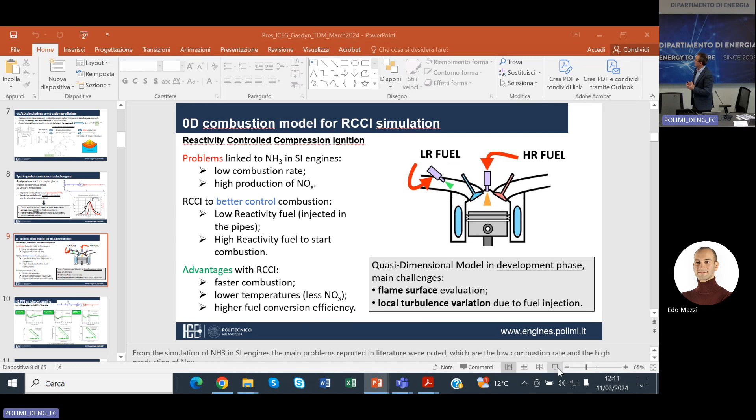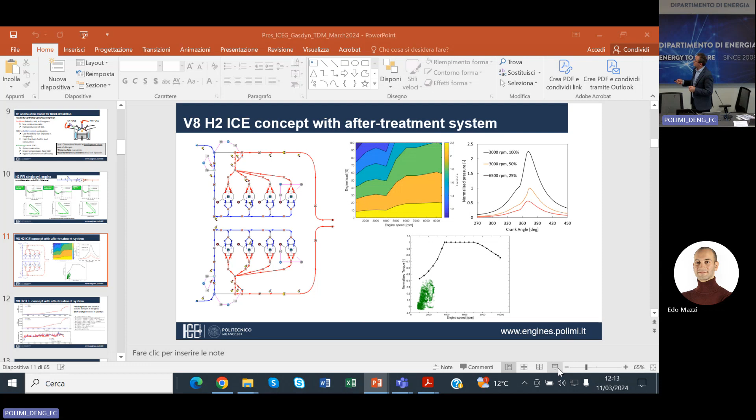So introducing an SCR, selective catalytic reduction catalyst, in the after-treatment system, we can calculate what is the abatement of NOx during a real drive emission cycle, an operating cycle. And it is evident that selective catalytic reduction system with injection of hydrogen, with use of hydrogen, is very useful.

Continue with another example of an industrial engine, a 6-cylinder turbocharged engine that initially in the original version is fed with natural gas, that has been converted to hydrogen just to see the reaction, just to see the potential of this industrial 6-cylinder engine, introducing a port fuel injection of hydrogen, changing the turbocharging, of course, because we need to recover the torque and the power. And it was possible to guarantee a good volumetric efficiency with low NOx emission thanks to very lean lambda equal to 2 in this case.

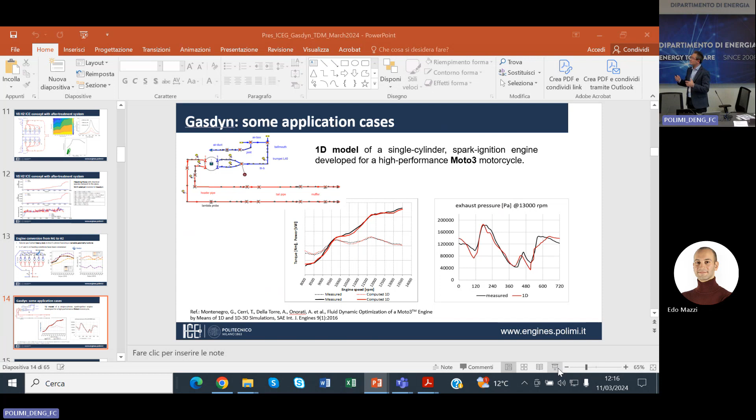Now, some examples just to complete the picture. This is a single-cylinder engine for high-performance motorcycle application, investigated for the Moto3 championship. You can see comparisons between calculated and experimental quantities: torque, power, pressure waves. The red is predicted, so we are confident that GASDYN can give a good representation of the engine, a virtual engine that works more or less like reality.

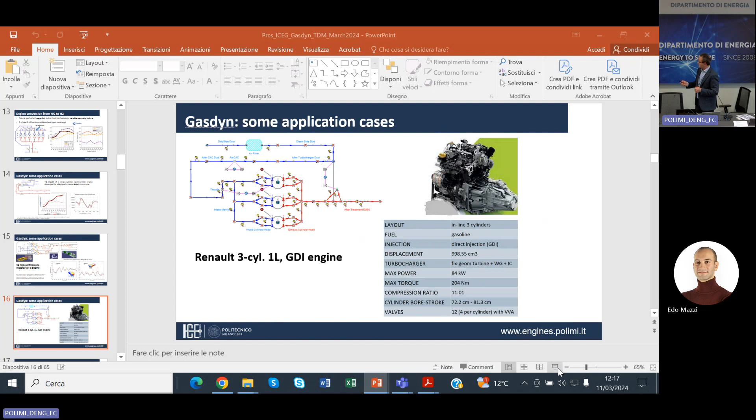This is another example we recently investigated. I mentioned already the 3-cylinder engine by Renault. It is a 1-liter gasoline direct injection engine with intake and exhaust pipes, turbocharged. We introduced PID controllers for the boost, for the air-to-fuel ratio, and so on.

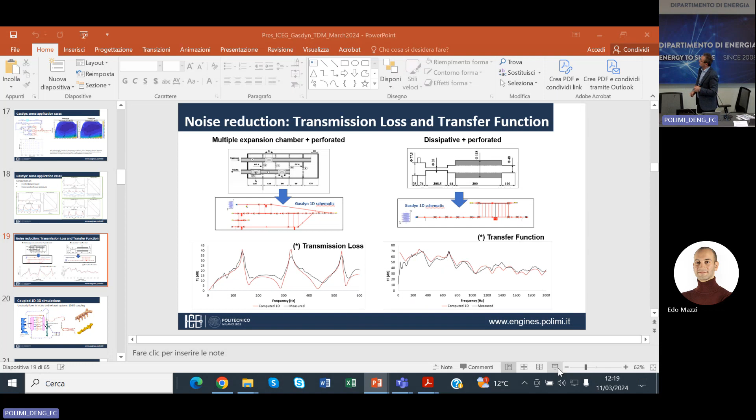To complete my discussion, I would like to mention the possibility to couple GASDYN with OpenFOAM, because there are two different worlds, 3D simulation and 1D simulation, that can help each other. We decided to strictly couple OpenFOAM and GASDYN, so it is possible to have a complete GASDYN 1D model of an engine, but then substitute a simple 1D domain with a 3D mesh where needed. For example, in the intake or exhaust system, you can put junctions, plenums, or other components in 3D. The two domains are strongly coupled numerically by means of Riemann solvers, so you can play with OpenFOAM and GASDYN and capture more details.

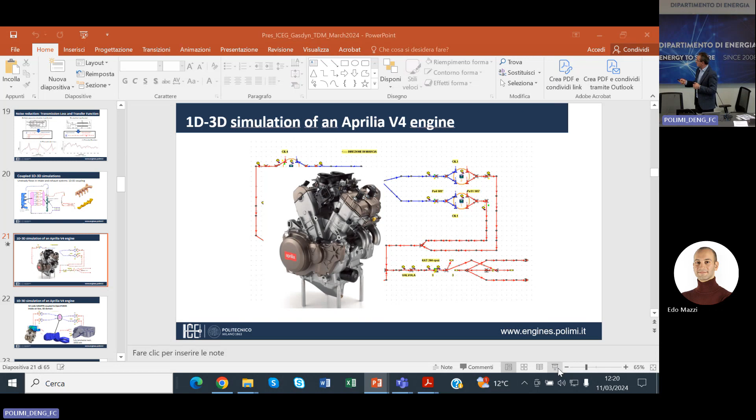I will show you what I mean. This is a V4 motorcycle engine for which we have a complete 1D schematic with 4 cylinders, with intake system, exhaust system, silencers. But the intake system is quite complex and a simple 1D approach is not always satisfactory. If you want to capture more details of wave motion in the plenum, you can introduce a coarse mesh representing the intake system.

Thank you very much. I think it's very important to have a full grip on what's happening in 1D, especially when it comes to coupling our advanced concepts. I was wondering, about the silencers—acoustics is always a difficult thing to capture—how much information do you actually need from the silencer to get that level of agreement? Are there acoustic transfer functions you put into the model, or is it just geometry? What's the level of information you actually need?

Yes, very simple, thanks for the question. Acoustics is complex, and a 1D model can't always capture all the details. But if you limit the analysis to 1,000-2,000 hertz, not more, you can capture the planar waves in the system. You need detailed information about the length of the pipes, diameters, volumes, the location of perforations, and the size of the holes. If you represent the internal structure with acoustically equivalent 1D piping systems, you can fully predict the transmission loss. One issue is if you have a dominant transversal size, you'll induce not only longitudinal waves but also transversal ones. In that case, the transmission loss is completely different, and you need a 3D or quasi-3D approach to capture the details. But as long as you limit your analysis to 1,000-2,000 Hz, you probably capture all the information.